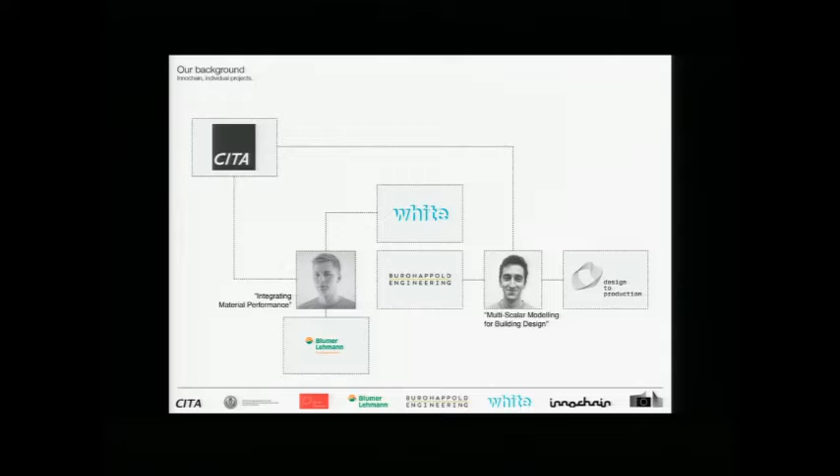So my project is entitled Integrating Material Performance in Freeform Glue-Laminated Timber Assemblies, and it's part of the Communicating Design work package, which challenges the separation and discretization between knowledge domains by proposing new links between various domains of knowledge in the architectural design and fabrication process. And that's supported by partners, a partnership with White Architects in

Stockholm and Blumer Lehmann in Switzerland. And on my side, I'm collaborating both with Buro Happold and Design to Production. My research project is entitled Multi-Scalar Modeling for Building Design, and looks at data exchange between different scales and resolutions during the design process of large-scale architectures, both during early and late design stages.

So we will start introducing what is multi-scalar modeling. Probably most of you have seen this short movie from Charles and Ray Eames, during which the camera zooms continuously in and out from a quiet couple picnicking inside a park to the scale of the universe and back through the skin at a molecular level.

So the question that is raised here is how do we transit between the different scales during a design process? This is also a topic that is looked at in other scientific fields. Basically, this topic comes from the realization that the full behavior of a system cannot be represented within one single model because the level of detail differs from one scale to another.

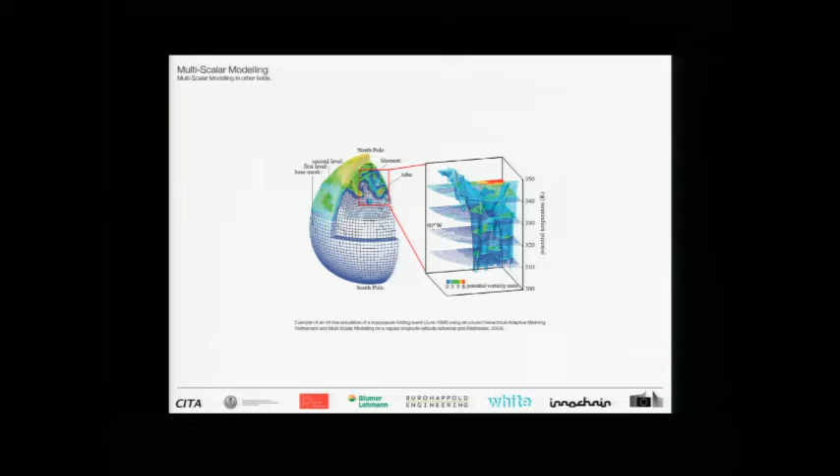For example, here in this image, this is a global environmental model that simulates a tropopause folding event, which is when different layers of the atmosphere are encountered together. And of course, you don't want to simulate this for the whole Earth, but only at a specific, localized location, and see how these influence higher levels.

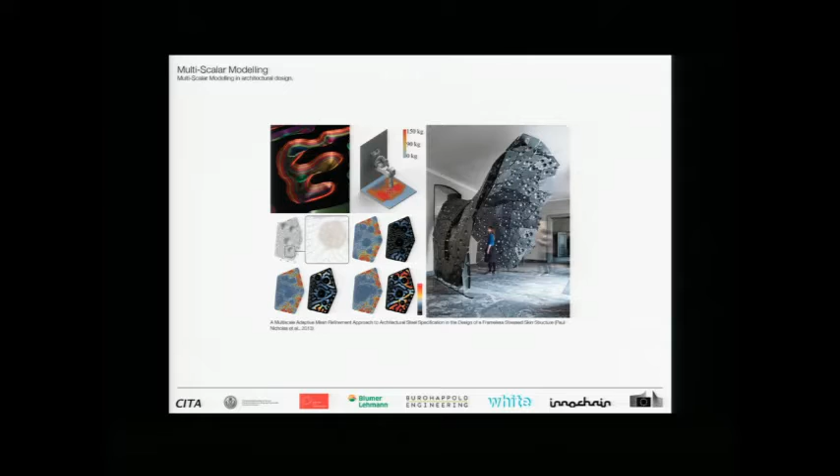There is an existing architectural design project that deals with multi-scalar modeling and tries to transfer the information between different scales, from material specification and robotic fabrication through a more global design environment. This is the Stressed Skins project that was realized at CITA.

We are particularly interested in looking at larger and more complex building designs where there are a lot of different layers of material that have to interact with each other. And it's sometimes very difficult to set up a continuous integrative computational design workflow.

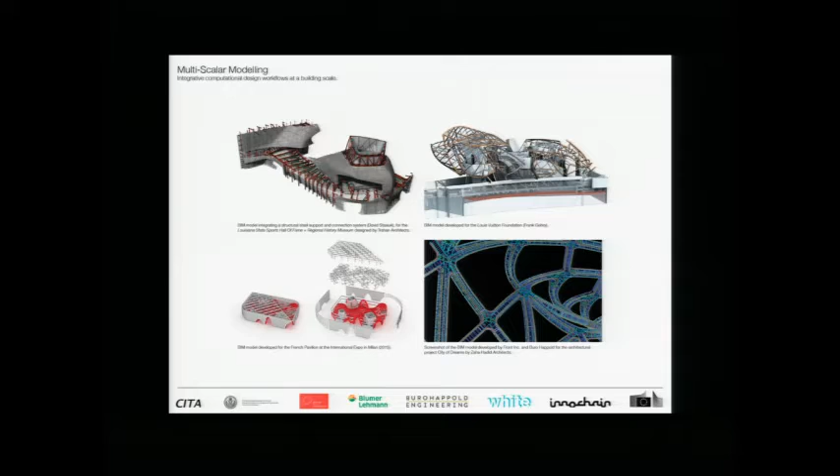So we believe that breaking down such complex geometries into different levels of resolution can ease the handling of their design process.

You can look at wood as a multi-scalar material when you think that the fiber layouts of the smaller scales impact the structural performance of larger elements and assemblies.

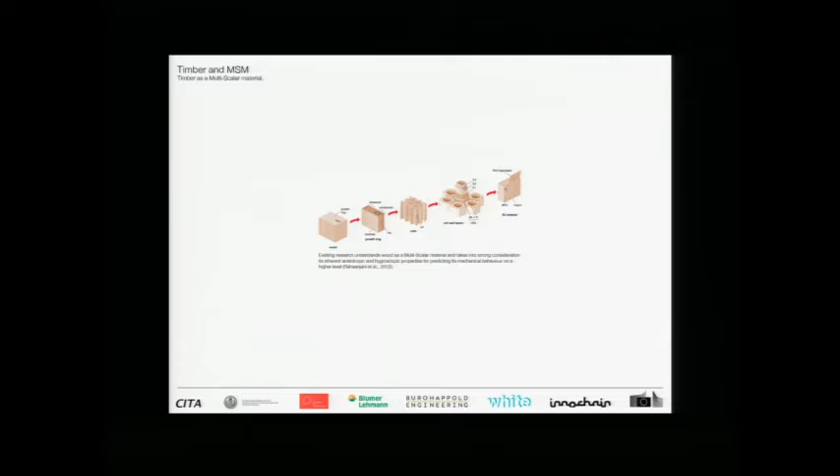Yeah, so today in the timber industry, we see it operating at quite a large scale and high rate of automation. These are some examples of state-of-the-art projects right now in complex timber manufacturing, we would say.

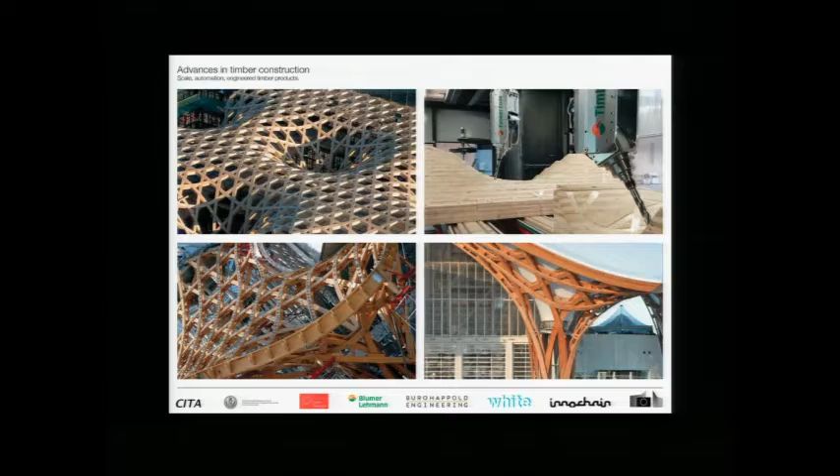So the material system here is obviously freeform glue-laminated timber, or glulam. And this presents a good opportunity to apply this sort of multi-scalar modeling approach, because if you consider all the steps and different resolutions of a material, larger design scales, you end up with a very varied spectrum of scales.

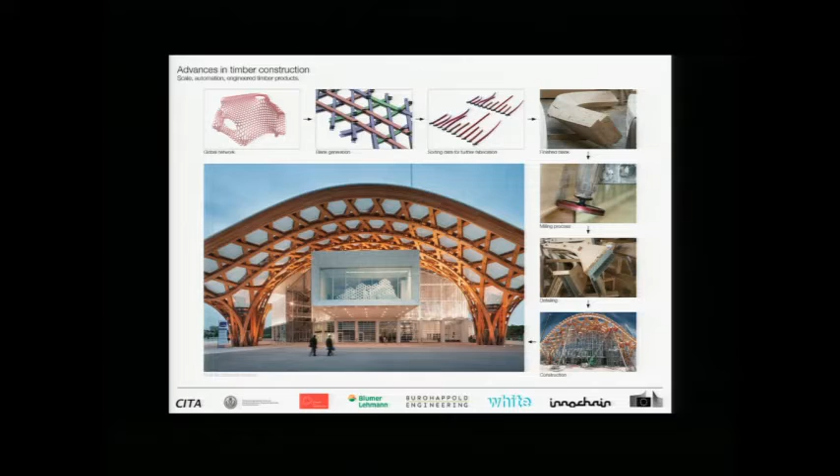So here we can see some of the steps and scales involved in the Pompidou Metz project, for example. Moving from the broad design-led network surfaces down to the component level, then to the glulam blank level, and then further on to the processing and assembly scales.

So what that means is, if we look at glue-lam as a sort of multi-scalar engineered product, a glue-lam is essentially an aggregation of smaller lengths of timber from which all the defects have been cut out, which are pressed and formed into either straight blanks or curved free-form blanks.

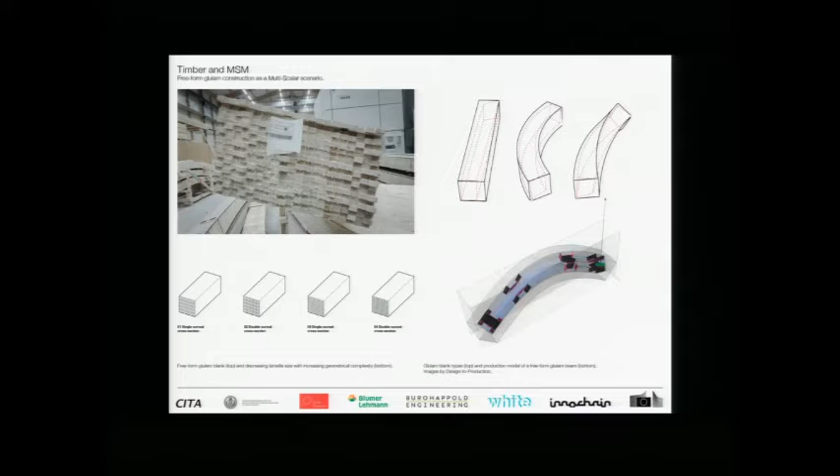This means that the composition and making process of these blanks is tied to the geometric complexity of the required design element, which means that different types of glulams require varying degrees of fabrication complexity and material usage, depending on whether they're linear, single-curved, or double-curved with twisting.

So there can be this relationship between the glulam type and composition and the broader design objectives and requirements. There we see this kind of link between the two scales of the material system and the larger elements.

So we have been working on the design and realization, or partial realization, of a demonstrator where we could address the different challenges just mentioned.

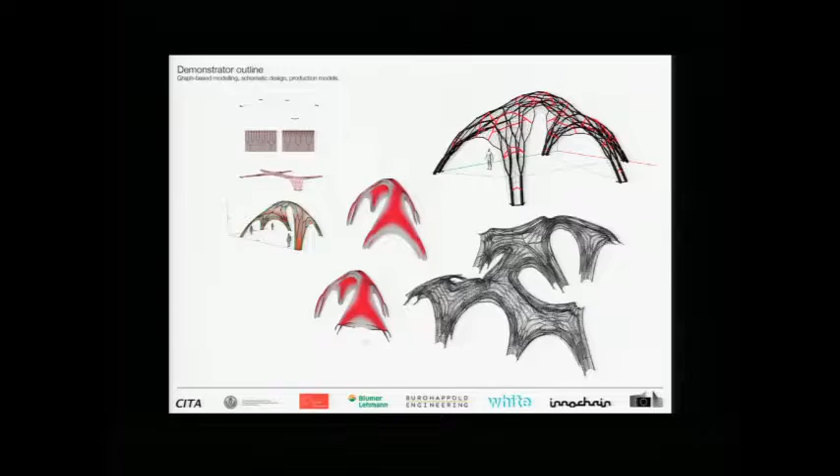We started from an abstract network or graph that defined the overall condition and extended the design workflow, where we were able to map a simple branching pattern onto a global structure, and onto which we could also map each single glue-laminated timber element.

The same graph helped us to generate and localize particular components during the design process. This graph-led approach allowed us to keep the relationships alive between sub-elements, which allowed us to further zoom in on each element more specifically, while retaining relationships to the broader model.

So it also raised the question of how to model these relationships between the overall design element and glulam composition. This led to the development of some software tools that allowed us to quickly look at the material specifications of individual glulam elements.

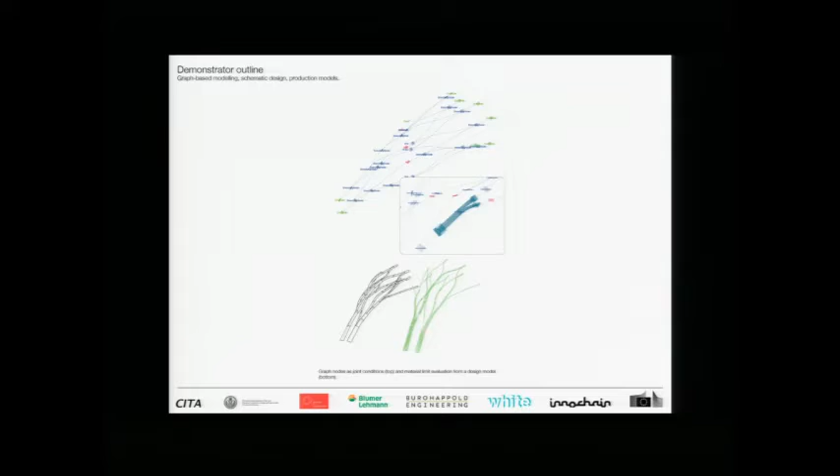On the top you see a curve model that is driven by the higher level graph models, which starts to define curvatures, element positions, and rough geometries. On the bottom you see the relationships between individual lamellas from each blank, while still retaining a relationship to this higher level model.

So what the bottom image is showing is actually each lamella in each glulam being tested for material bending limits according to some specified ratio.

So it allows us to swap very quickly between very low level material data and adjust at a higher level as well.

And then we started finally mapping the different levels of resolution that we had to deal with, from the high-level global graph providing us fabrication information for each component, lamella size, thickness, down to the corresponding fabrication space.

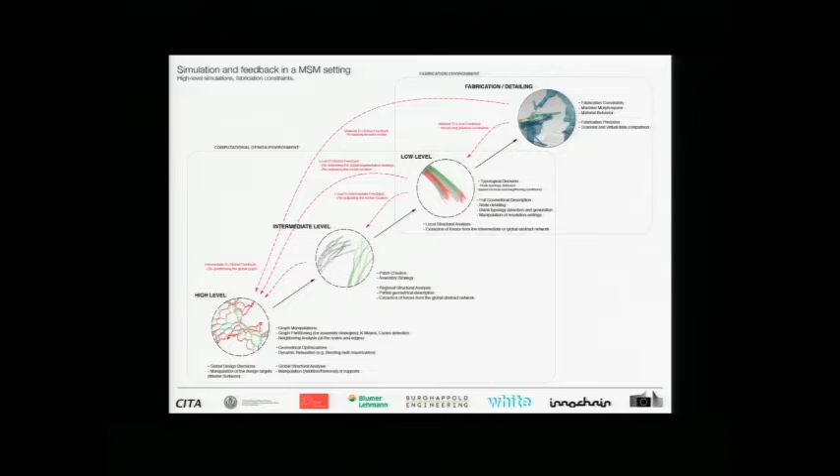All levels could communicate and interact with each other through means of feedback, where, for example, the spring-back factor of the physical prototype was measured through a scanning process and taken into account in the next fabrication iteration.

This diagram just reiterates that idea of feedback between scales, which basically means that constraints at lower scales could start to bubble back up and affect the higher scales.

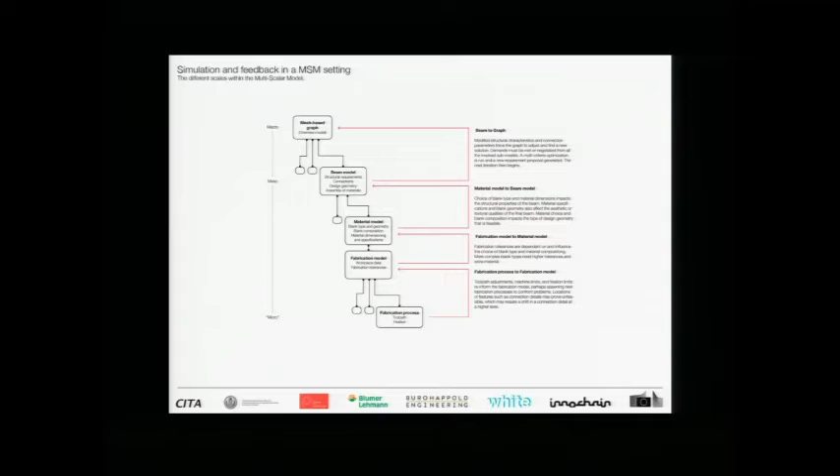Most notably here for us was constraints in the material model, especially in terms of lamella sizing. So changing or constraining lamella sizes affects how curved the glulam blank could be, which therefore affects how closely the fibers of the timber blank could align to the beam element axis, which then goes on to affect its structural capacity and therefore might force a reconsideration of the element's role in the larger model.

So it was this ability to spot challenges or risks at the fabrication level while simultaneously manipulating the overall design, which allowed a flexibility and adaptivity that would, I think, be tougher with other more linear design processes.

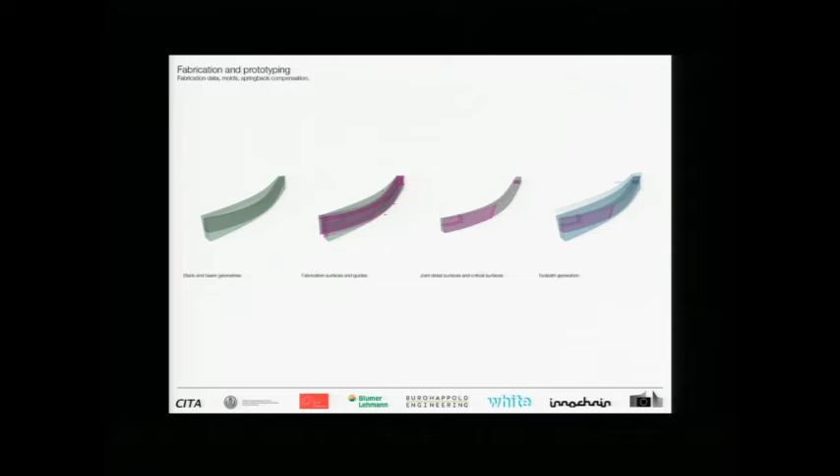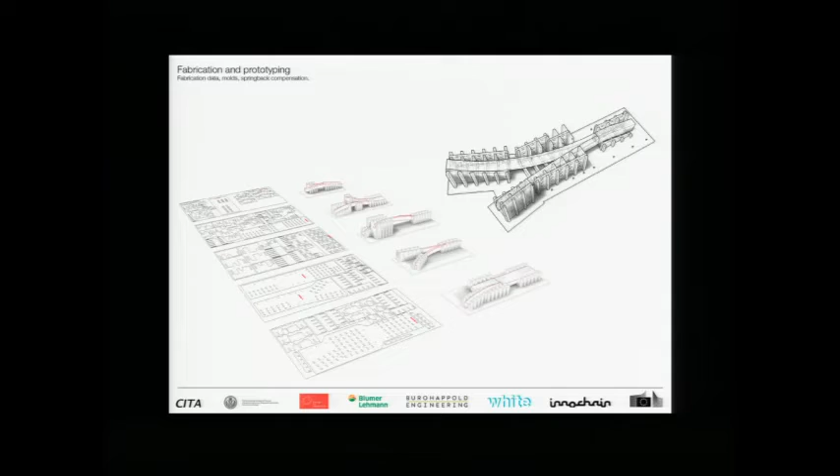And that fed through also into the making of some molds for these things. So as another sort of scale within that fabrication process, we looked at how the molds are made, what the difficulties there are, and how they can feed back into a more intelligent design of, for example, a beam member. One particular behavior specific to laminated wood is springback, which we had to compensate for in some cases.

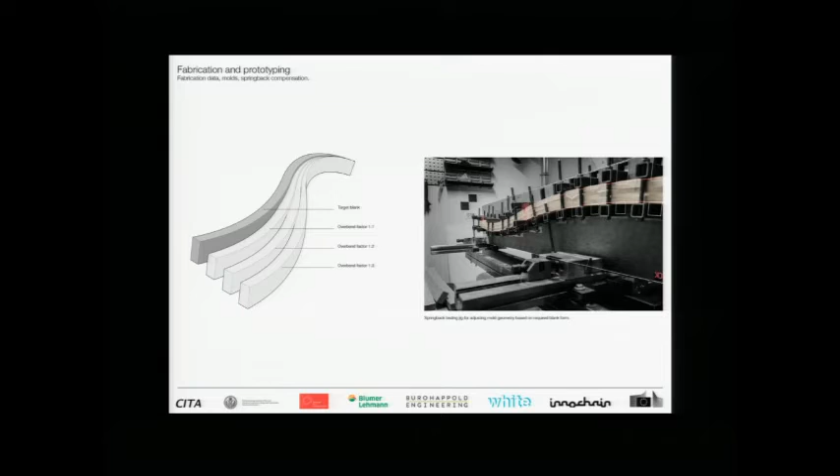So this was an opportunity to look at this and how we could feed this kind of material behavior back into the mold models, in this case, which had to overbend the glue lams by certain factors to get the desired result in the end. Combined with 3D scanning, this let us adjust mold models based on previously made elements, as Paul just mentioned.

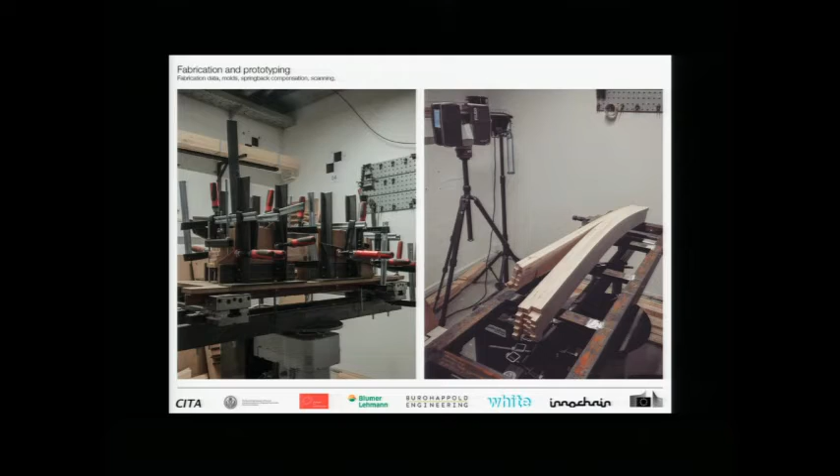So here are some photos of some of the prototyping. We took some of these elements through to fabrication to try to test the feasibility of the whole process, but without proper pressing and forming equipment. The process is quite laborious and work intensive, so improving the actual glue lam fabrication process is another ongoing effort in parallel to all of this. On the right you can see the 3D scanning of one of the prototypes.

And speaking about scanning, scanning was used in the process in mainly two ways. The first was to link the real fabrication space to the modeling environment so that we could position and monitor the workpiece in front of the spindle.

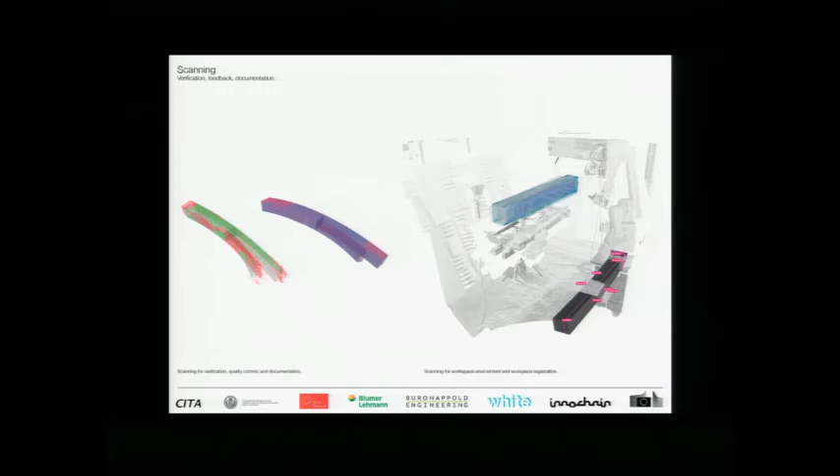And the second was as a way of verification and documentation. That means to see the deviation between the made object and the model, but also as a way of documenting the process and keeping track of the history of the objects that we've made. And this opened up the question of how an extended documentation of these sorts of prototypes can inform later models, not just for that specific project, but in terms of technique.

So this sort of multi-scale modeling approach led to a proposal for the Tallinn Architecture Biennale based on the demonstrator that we were working with before. What this method allowed us to do was to create quick design iterations while zooming in on specific elements and conditions. This helped the success of the proposal because it allowed us to discuss the overall design on an architectural level while also discussing very specific fabrication issues with fabricators in the same sort of way.

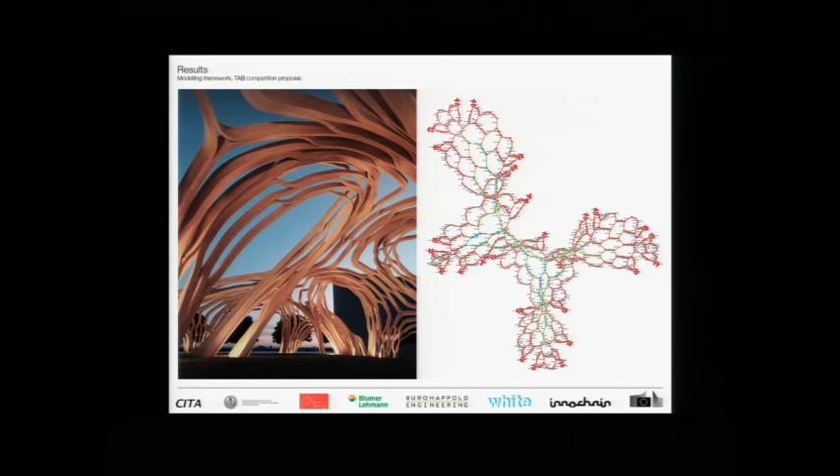In this case there was a direct link between the abstract graph that you see on the right and the 3D model. For example, each line thickness corresponded to members that were thicker, and the color code corresponded to the degree of centrality of each element, which we think could help us for assembly.

And just to finish off with where the work has gone in the meantime: subsequently, Paul and I both pursued different aspects of this project in our own individual research projects. I've been looking more closely at this integration of scanning and sensing methods in glue lam production with the help of my industrial partner. This effort is looking at opportunities to use scanning and sensing to acquire useful material feedback that can better inform the production process.

So, to develop sort of soft fabrication models that are more adaptive and more sensitive to what is actually going on in the process. But perhaps more interestingly, this also pursues the question of how material feedback could be documented, stored, and leveraged for future use. In this way, it could present a sort of recorded experience that could inform how certain design decisions have specific fabrication consequences.

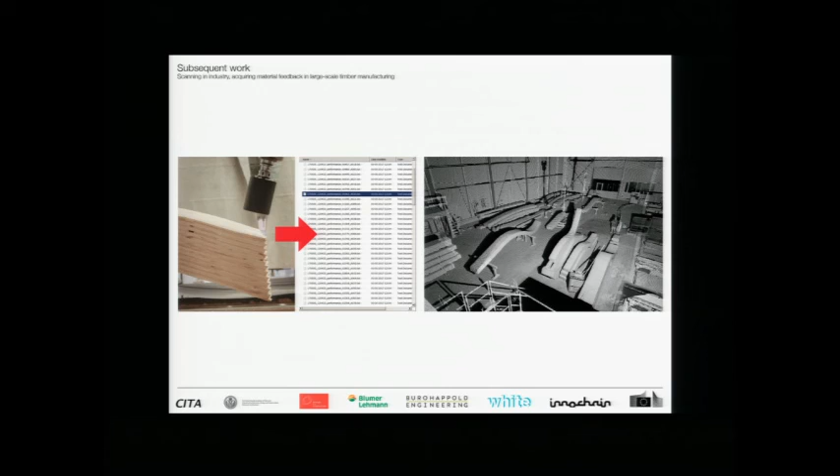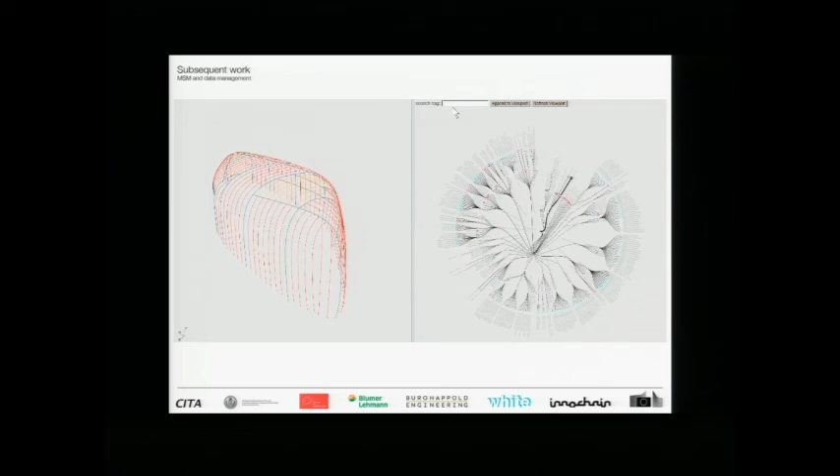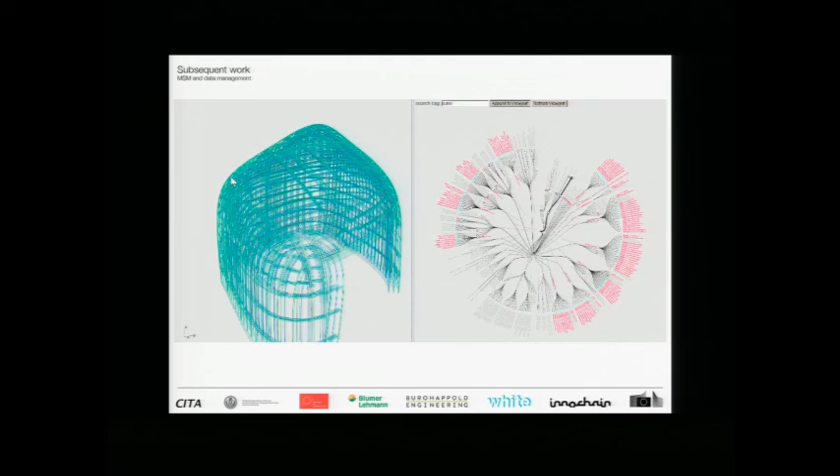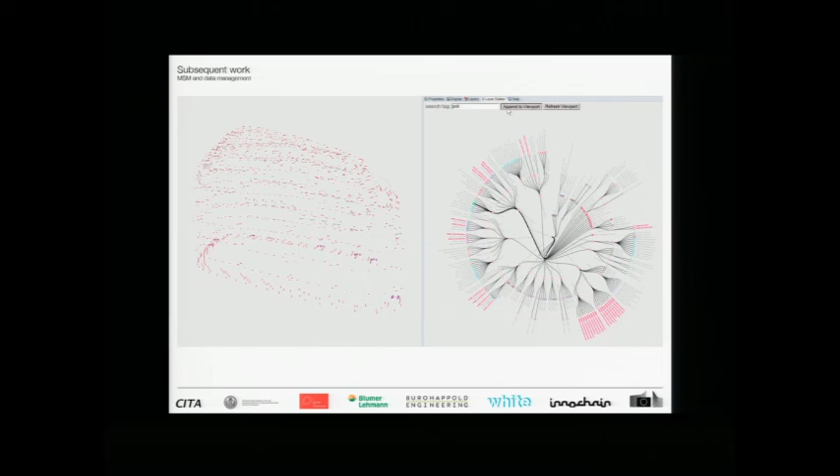And on my side, I've been actually looking at the other end of the spectrum, where the data is actually produced. How do you navigate through this space where you end up with very intricate layer tables that design production is working with? Here, in this interface, you're able to input a tag that searches through the layers whose names contain this tag, and then display the object in your viewport.